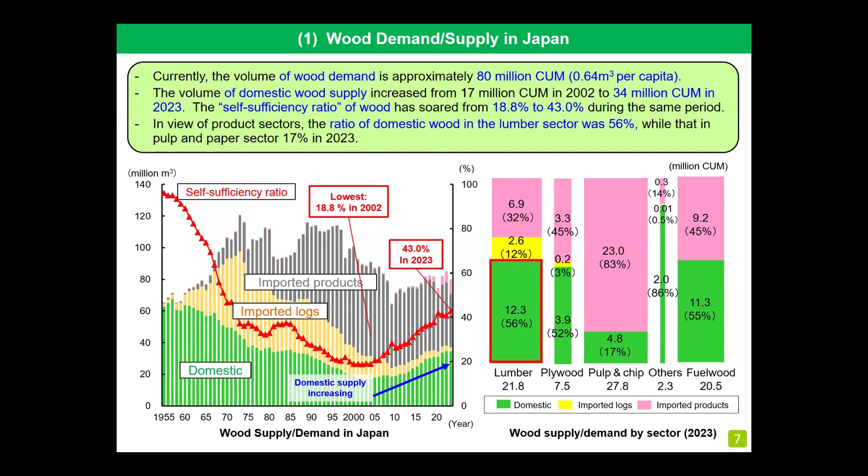In Japan, housing is the most significant sector for wood use. The share of wooden structure in housing is exceptionally high in the world. As shown in the left figure, the ratio of wooden housing to all housing, shown as the red line, remained around 55% for more than 15 years.

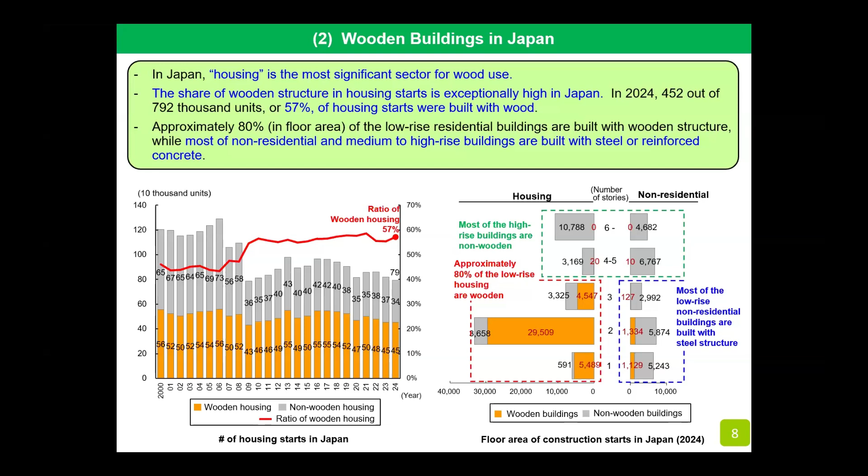The right figure shows the floor area of residential and non-residential construction starts by the number of stories. The orange area shows wooden buildings, and the gray area shows non-wooden buildings. If you look at low-rise, 3 stories or lower residential sector in the red dotted box, 80% of floor area is built with wooden structure. In contrast, most of the low-rise non-residential sector in the blue dotted box, and medium to high-rise sector, 4 stories or higher in the green dotted box, are built with non-wood materials like steel or reinforced concrete.

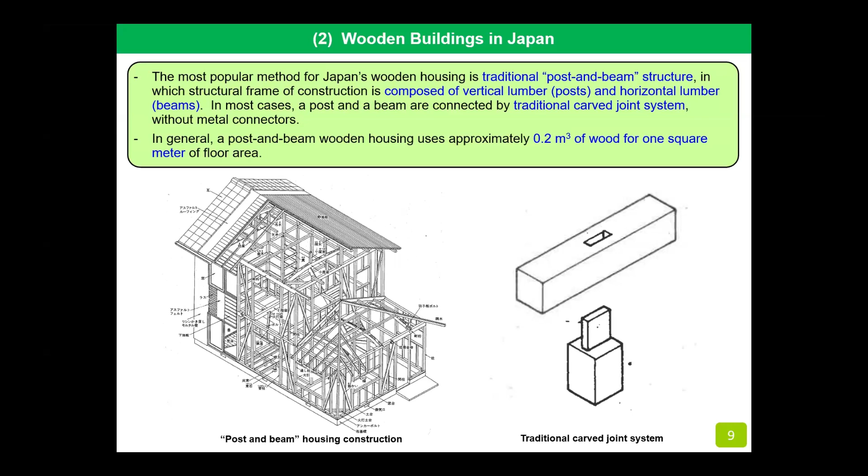The most popular method for Japan's wooden housing is the traditional post and beam structure shown on the left figure, in which the structural frame is composed of vertical and horizontal lumbers. Those lumbers are connected by a traditional carved joint system shown on the right figure. In general, post and beam housing uses 0.2 cubic meters of wood for 1 square meter of floor area.

In contrast to the higher ratio of wooden structure in the housing sector, non-residential buildings are mostly built with steel or reinforced concrete. In fact, the government promoted non-wooden building structures for public buildings after World War II in order to prevent fire and disaster.

But in 2010, the government introduced the law for the promotion of wood use in public buildings. The law obliged the central and local governments to promote wooden structure and wooden interior decoration in public buildings as long as possible. Thereafter, the ratio of wooden structure in low-rise public buildings rose from 18% in 2010 to 31% in 2023, as shown in the right figure.

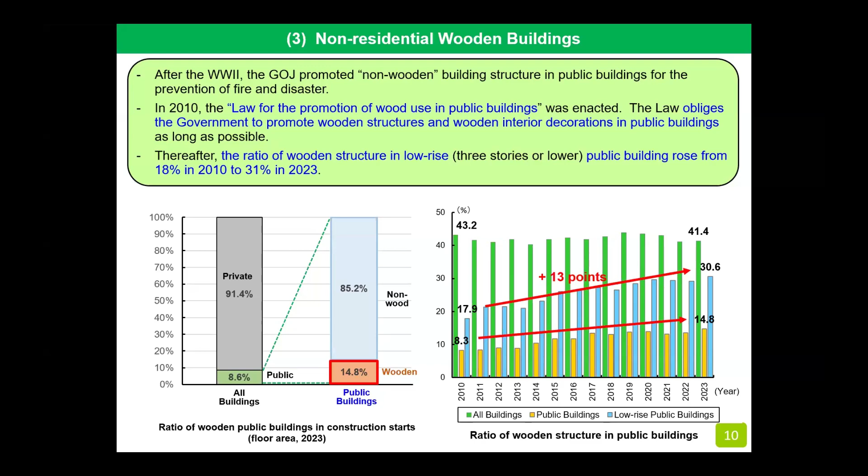In 2021, the law was revised to the Law for the Promotion of Wood Use in General Buildings, expanding its scope to cover private buildings as well as public buildings. The revised law introduced a voluntary wood use promotion contract system in which the central government, local governments, and private entities declare to promote wood use cooperatively.

Based on the contract, the government will provide necessary assistance to the contracted parties. As described at the bottom of the left side, the revised law designates October 8th as National Wood Use Promotion Day, because the Chinese letter for wood can be divided into the letters for number 10 and number 8.

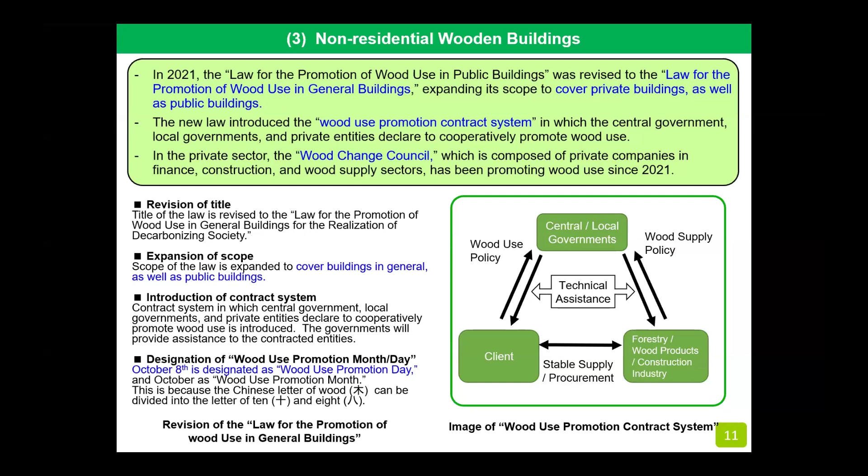Next issue is medium to high-rise wooden buildings. Structural members in medium to high-rise buildings are required to satisfy specific fire resistance performance stipulated in the building standard law. As shown in the right table, one hour of fire resistance performance is required for structural materials applied to the first to fourth floors from the uppermost floor, for instance.

In order to satisfy these requirements, private construction companies have already developed high-performance fire-resistant wooden materials which are covered with fire-resistant layers of incombustible materials, as shown in the left figures.

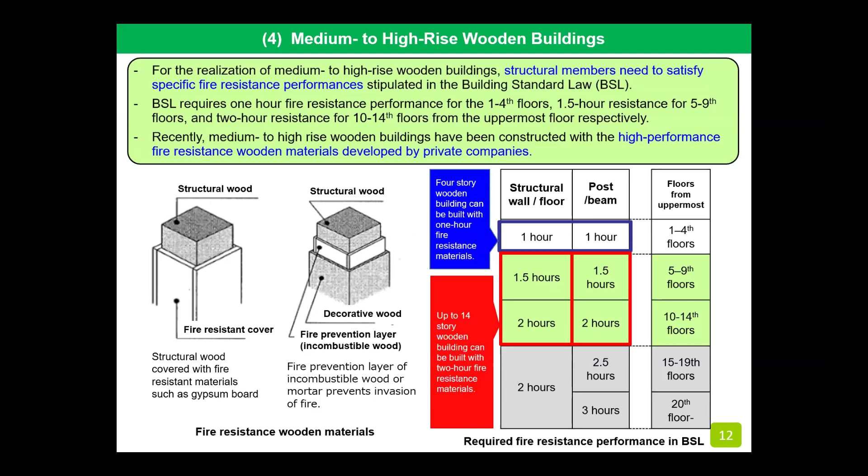Such fire-resistant wooden materials have made it possible to build many medium to high-rise buildings with wooden structures. In 2022, a purely wooden high-rise building with 11 floors named Port Plus was constructed in Yokohama.

CLT is another breakthrough for medium to high-rise wooden buildings. As you may know, CLT, or cross-laminated timber, has advantages of short construction period, lightweight, and high insulation performance.

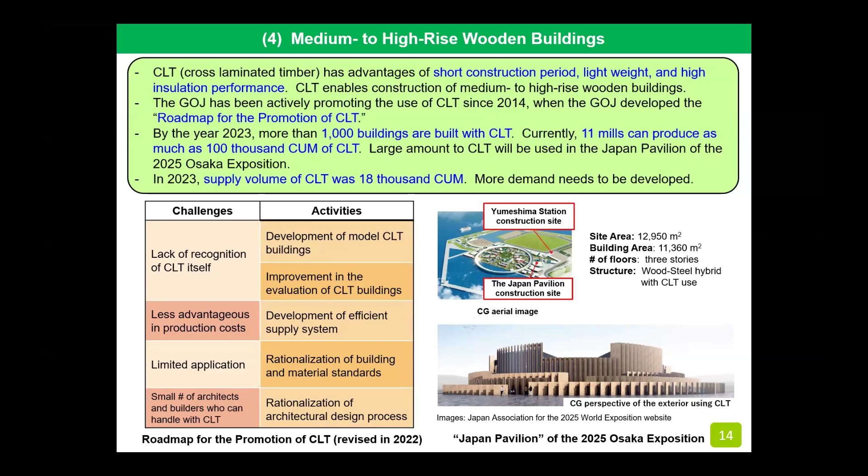Since 2014, the Japanese government has been promoting the use of CLT under the official strategy of the roadmap for the promotion of CLT, as shown in the left table. Also, a large amount of CLT is used in the Japan Pavilion of the 2025 Osaka Kansai World Exhibition, which started last month in Osaka, as shown in the right figures.

Next, I'd like to turn to the dissemination of the significance of wood use. Since 2005, the government has been promoting the significance of wood use to the general public through the national drive named Kizukai, which has a double meaning of both wood use and due consideration in Japanese.

The government is also cooperating with the private sector for wood use promotion, such as the Wood Design Award for consumer-oriented wood products, or wood education for small children. Also, Japan's major private corporations established the Wood Change Council for the promotion of wooden construction and interiors.

Then I'd like to move on to the sustainability issue. In the construction sector, wood use is expected to contribute to the carbon neutral society, as well as environmental, social, and governance (ESG) investment. Last year, the Forestry Agency developed the evaluation guidance of wood use in buildings for construction companies to appeal their efforts of wood use to financial institutions.

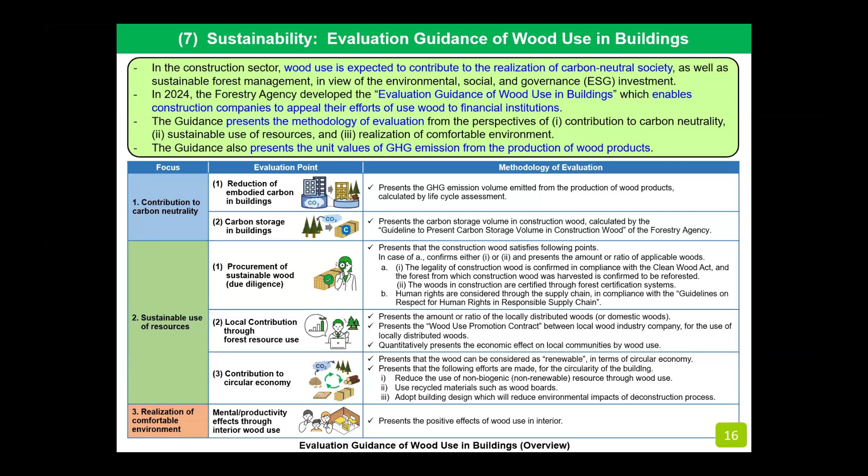The guidance presents the methodology of evaluation on contribution to carbon neutrality, sustainable use of resources, and realization of a comfortable environment, as shown in the table below. The guidance also presents the unit value of GHG emission from the production of wood products, as shown in this page.

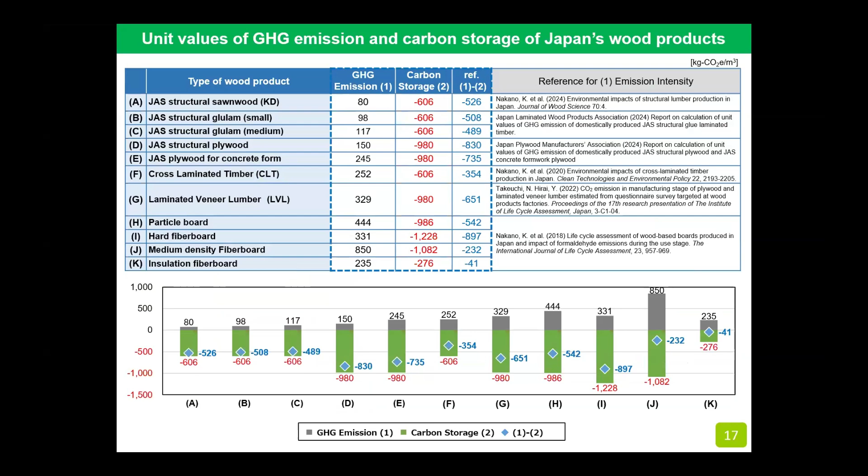I'd like to finalize with some conclusions. In Japan, most of wood demand depends on the housing sector. However, the number of housing starts will drop sharply in accordance with the decline in population.

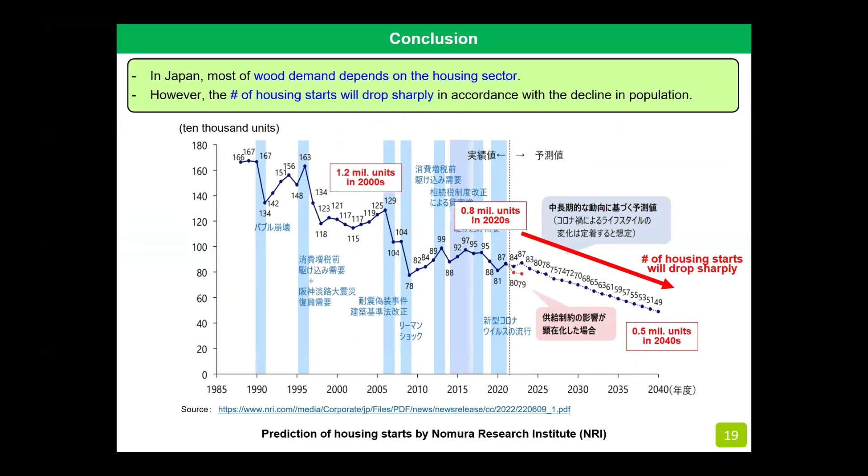In order to secure wood demand in Japan, wood use needs to be promoted in non-residential buildings and medium to high-rise buildings. Regarding non-residential buildings, the revised law for the promotion of wood use in general buildings promotes wood use in the private sector as well as the public sector.

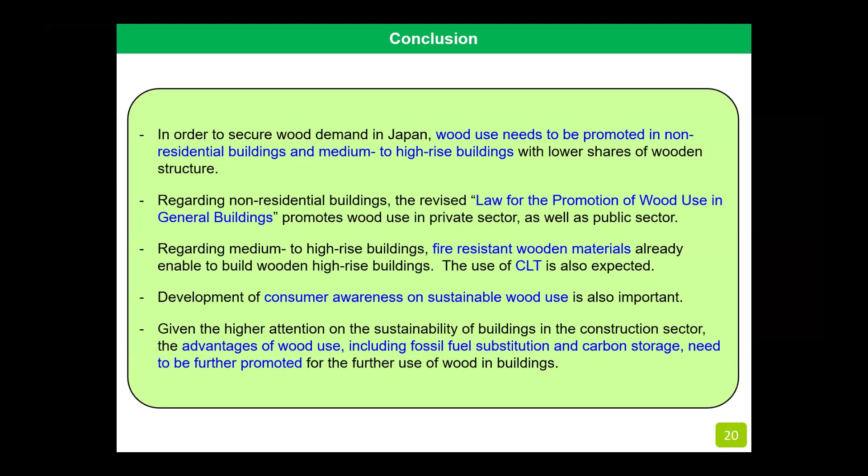Regarding medium to high-rise buildings, fire-resistant wooden materials have already enabled the construction of wooden high-rise buildings. The use of CLT is also expected. Development of consumer awareness on sustainable wood use is also important. Given the higher attention on sustainability of buildings in the construction sector, the advantages of wood use, including fossil fuel substitution and carbon storage, need to be further promoted for greater use of wood in buildings.

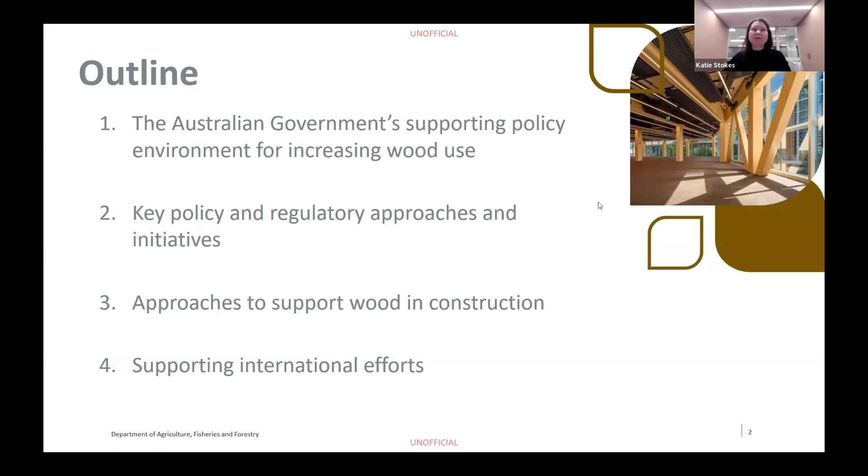The Australian government recognises the needs and benefits for increasing the use of sustainably sourced forest products. As we drive efforts internationally towards sustainable consumption and production, and we increasingly move towards a circular economy, we're all really aware of the invaluable role that forests and forest products can play. Forest products, when sourced sustainably, are renewable. They're able to store carbon and can offset other more emissions-intensive materials such as steel and concrete in construction. And at the heart of this lies sustainable forest management.

Australia is a really strong advocate for sustainable forest management and has comprehensive legislation in place to maintain forest ecology, biological diversity, and the full range of environmental, economic, and social benefits across all forest uses.

A key part of increasing wood product use globally is ensuring that we've got an adequate supply of wood. And that's about increasing our wood use without inadvertently leading to increased deforestation or forest degradation rates. The FAO projects that wood fibre demand may grow by as much as 50% by 2050 and take up to 33 million hectares of new plantations to meet. Given that it takes time to grow our wood resources, we need to plan now for tomorrow. Internationally, there's a need for increased emphasis on policies and programs that will ensure timber fibre security.

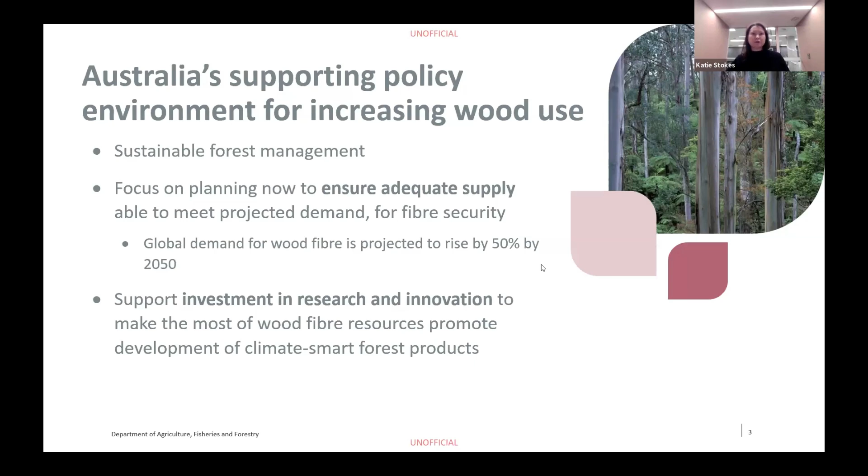The Australian Government has a number of key initiatives that focus on ensuring sustainable supply of forest products and promoting research and innovation in the forest industry. The Support Plantation Establishment Program aims to expand our domestic supply of timber, particularly our construction and manufacturing timber resources, while at the same time contributing to Australia's carbon emissions reduction targets and supporting regional communities through retaining and creating regional jobs. To further support a sustainable timber supply, since 2012, Australia has had comprehensive illegal logging prohibition laws in place. Our laws combat illegal logging and promote the trade of legal and sustainable timber products in Australia. We've recently updated these laws to ensure that they remain fit for purpose and align with international best practice, including implementing new provisions to allow for timber testing and verify claims of species and origin.

On the research and innovation side, the Accelerate Adoption of Wood Processing Innovation Program supports the medium to long-term sustainability of wood processors by stimulating investment in upgrades to manufacturing lines and supporting innovation to domestic products.

By supporting wood processing facilities to use innovative technologies in their production, Australia's forest industry will be able to supply more of our wood demands into the future. We've also established an Australia-wide National Institute for Forest Products Innovation, known as the Australian Forest and Wood Innovations. The institute was developed in partnership between the Australian Government and the University of Tasmania.

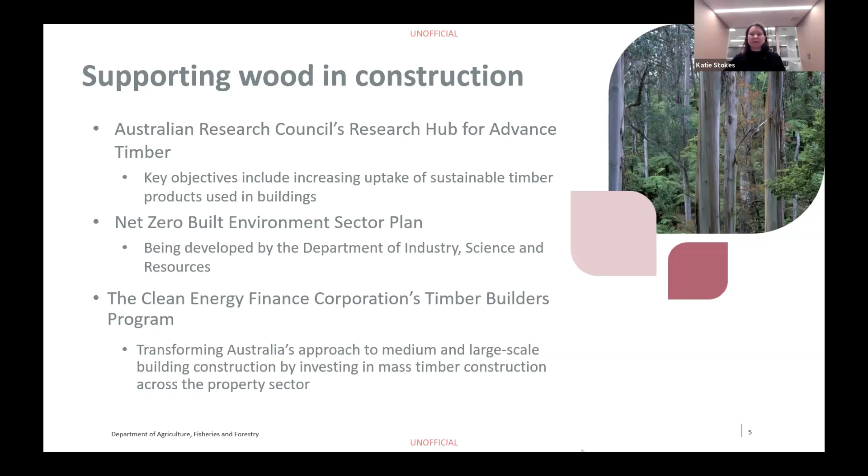Also worth mentioning here is the Australian government's current development plans to help major sectors transform to net zero economy in support of Australia's net zero plan. Under this initiative, the government's working to build a built environment sector plan to provide a pathway for the sector to transition to net zero, taking a holistic approach, which will include considering embodied carbon emissions in construction materials.

The final point I wanted to touch on is the importance of international efforts to highlight the immense value of increasing the use of sustainable forest products, such as this one. I'd also like to emphasise several other programs that Australia sees as really beneficial in this space, including the Collaborative Partnership on Forests Sustainable Wood for a Sustainable World initiative, which showcases the full value of sustainable wood value chains.

The Wood for Globe in the margins of World Forest Week last year also focused on sustainable wood pathways and their role in achieving carbon neutrality and resilience. And finally, Austria's country and organisation-led initiative, which aims to promote a sustainable forest-based bioeconomy through evidence-based innovative approaches for knowledge sharing and accelerated actions. The COLI aims to scale up sustainable wood pathways, including the enabling conditions to ensure sustainable supply keeps pace and to accelerate the bioeconomy approaches and wood-based solutions.

In summary, I'd just like to re-emphasise that Australia is committed to a low-emissions circular economy that's built on sustainable wood products. We emphasise the need to consider the broader operating environment for increasing wood use, including continued research, innovation, and strategic investment in plantations and processing to lay the groundwork for a sustainable climate-smart forest sector and to help incentivise the increased use of wood in the built environment.

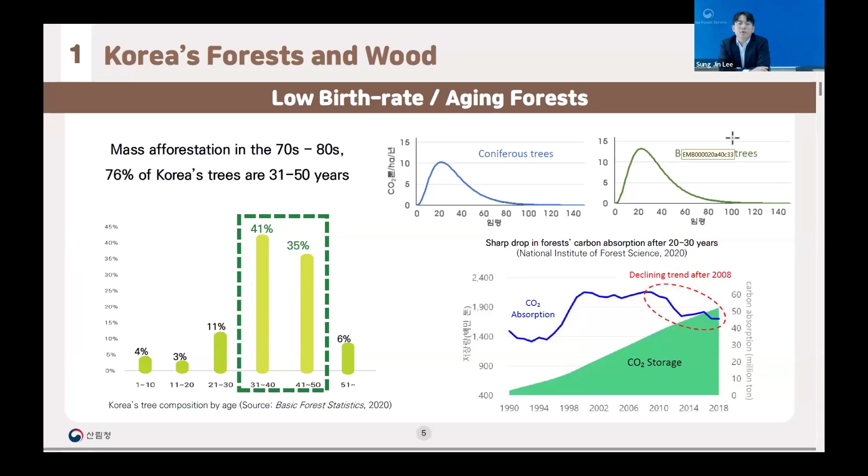However, we are now facing new challenges, such as an aging forest structure, just like the low fertility rate Korea is now facing, which reduces our forest carbon absorption capacity per year. And additionally, since Korea has gone through a very determined reforestation era, misconceptions about timber harvesting were created, and this has led to low timber uses in Korea. Currently, we're harvesting only about 20% of our productive capacity per year, which is much lower than other OECD countries.

And to address climate change, Korea has committed to reducing greenhouse gas emissions by 40% by 2030 compared to 2018. And forests will contribute 11% of this target through carbon sinks, afforestation, and increase of wood use. Korea's strategy involves using forests not just for carbon storage, but also as a substitute for fossil fuel intensive materials. And we aim to create a circular forestry resource management system from tree planting to sustainable harvesting and utilization.

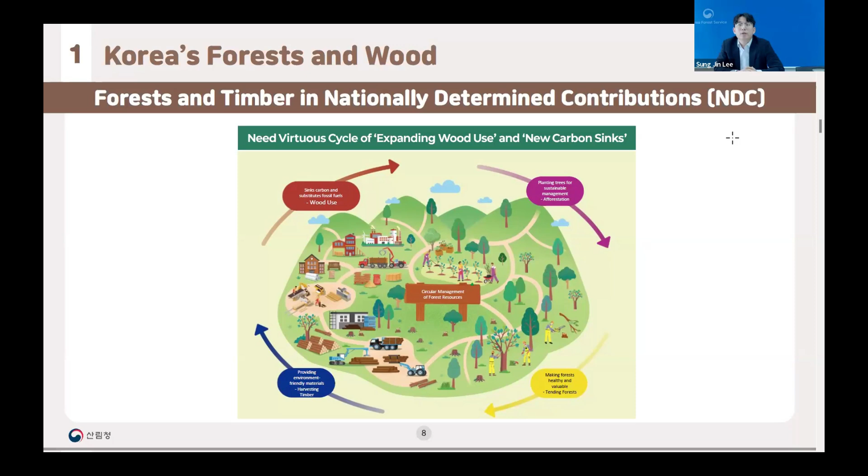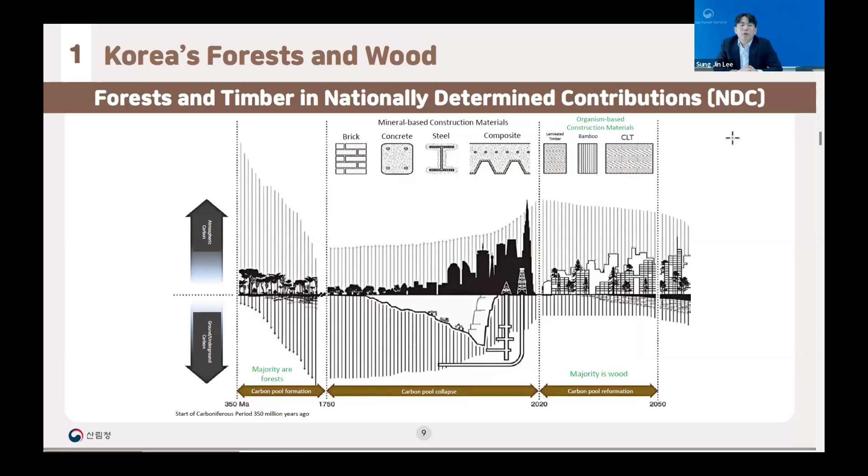And as you're well aware, we're trying to increase the use of wood, such as in wooden construction, in order to reduce the carbon in the atmosphere that has increased since the Industrial Revolution. And since Korea has difficulties with misconceptions of harvesting wood, as I mentioned, we are firstly focusing on increasing wood use in everyday life.

So we've launched public campaigns such as I Love Wood, including children's drawing contests, culture festivals, and social media outreach. These initiatives are aimed to raise awareness of domestic timber's environmental benefits. And we're also promoting public buildings made of domestic wood, for example, daycare centers and libraries. And we hope that citizens can see and feel the positive effects of wood, such as improved indoor air quality.

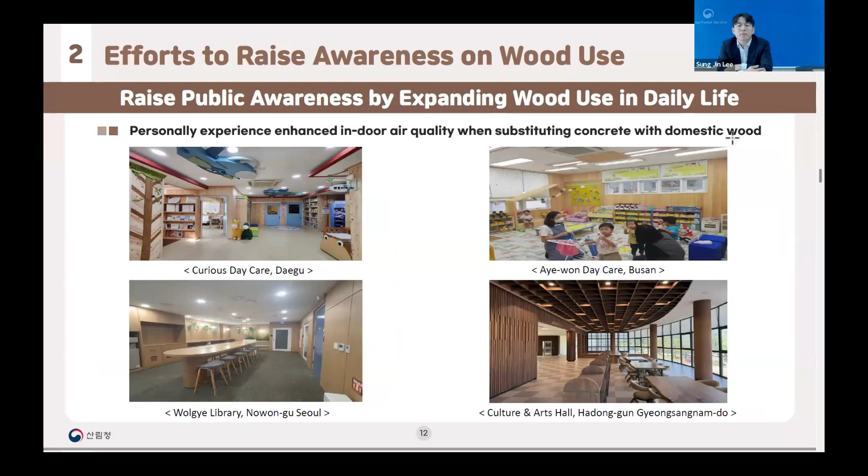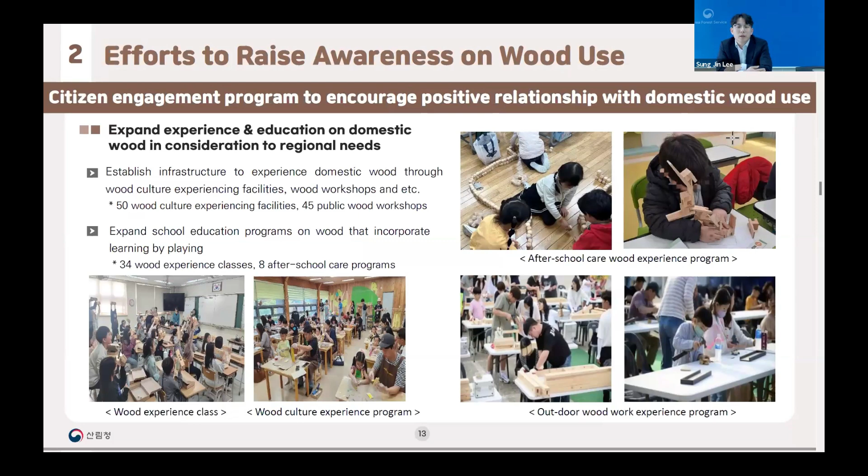Also, wood experience programs are expanding, offering hands-on learning in schools and communities through workshops and after-school classes. And to unify domestic wood branding, we created the Han Wood label, combining the Korean word for Korea, Han, and the Chinese character for wood. This is meant to help Korean consumers easily identify certified local timber.

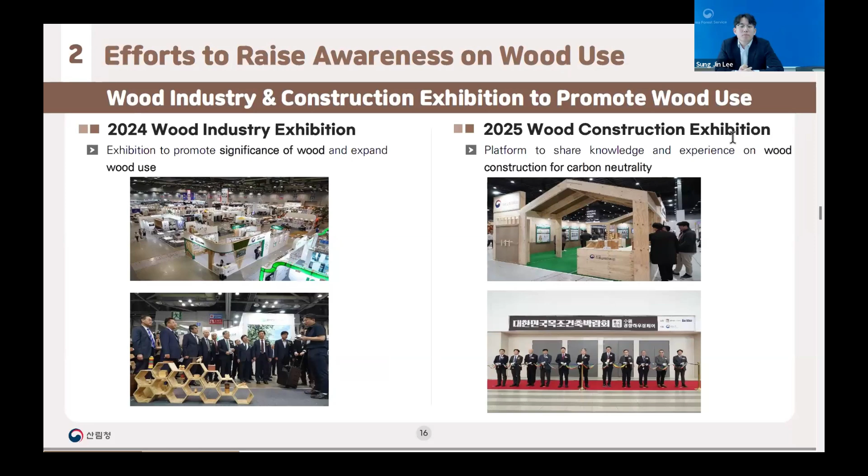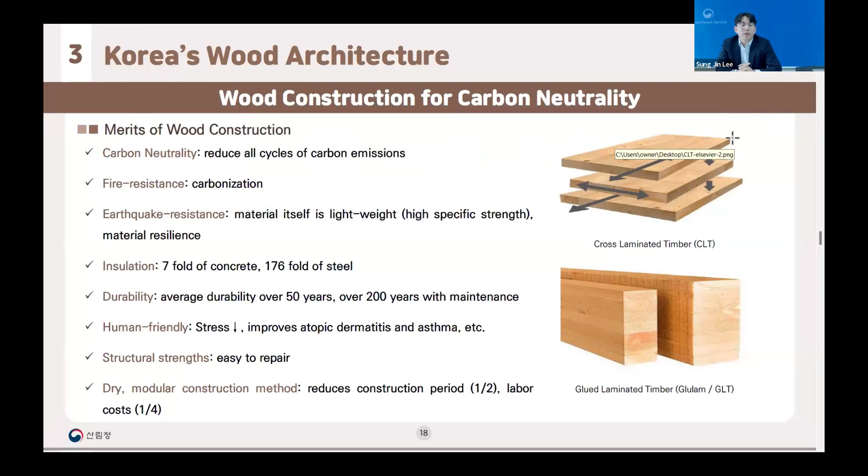We are hosting annual wood industry and construction exhibitions to showcase advancements and potentialities in wood-based architecture and trying to promote wood's role in achieving carbon neutrality. And although it has begun rather recently, Korea is investing in modern wooden buildings. For example, the Korea Forest Welfare Education Center is a 7-story structure, which is currently the highest in Korea. And it is built with over 1,300 cubic meters of wood, and it is storing more than 1,200 tons of CO2.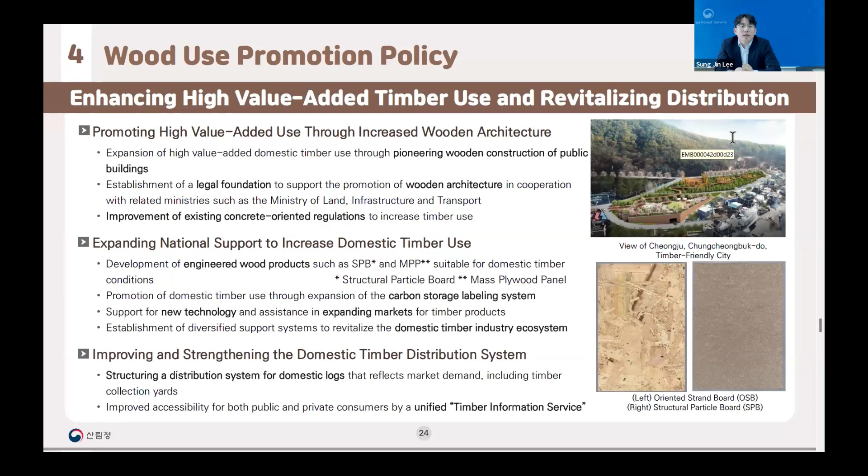And our wood use promotion policies aim to increase uses of domestic wood, especially with the manner of cascading principle, and improve its distribution. And we are revising concrete bias regulations to support wooden construction and developing engineered wood products, and we're also expanding the carbon storage labeling system for Korean wood products.

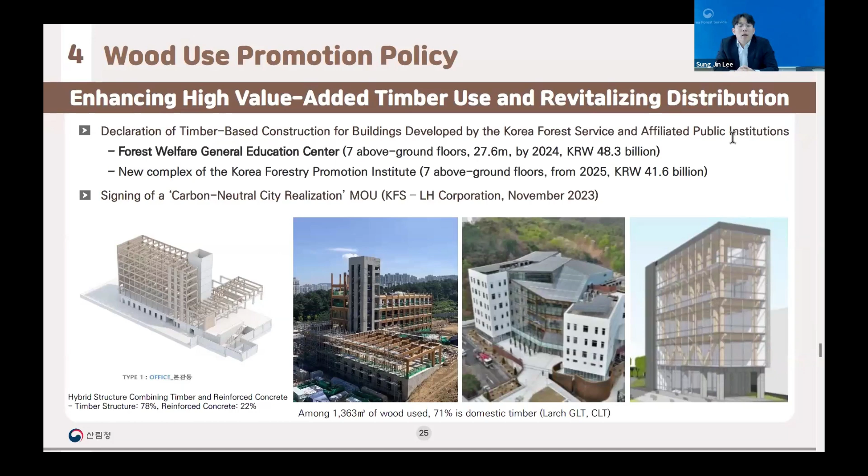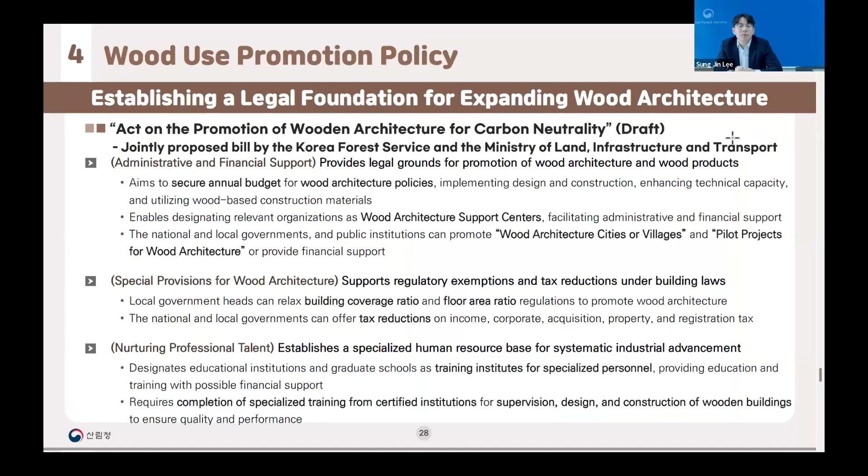And we're also piloting wood-based city models and urban infrastructure, such as bus stops and public facilities built with wood, to store carbon and raise public engagement. In addition, we are now drafting a wooden building promotion law to provide a legal foundation for wood architecture promotion. And this includes tax benefits, regulatory supports, and education of professionals in such industry.

The new legislation also emphasizes interagency cooperation between the Korea Forest Service and the Ministry of Land, Infrastructure, and Transport. We hope that once the law is introduced, a policy coordination committee will streamline joint efforts to promote wood architecture across the country.

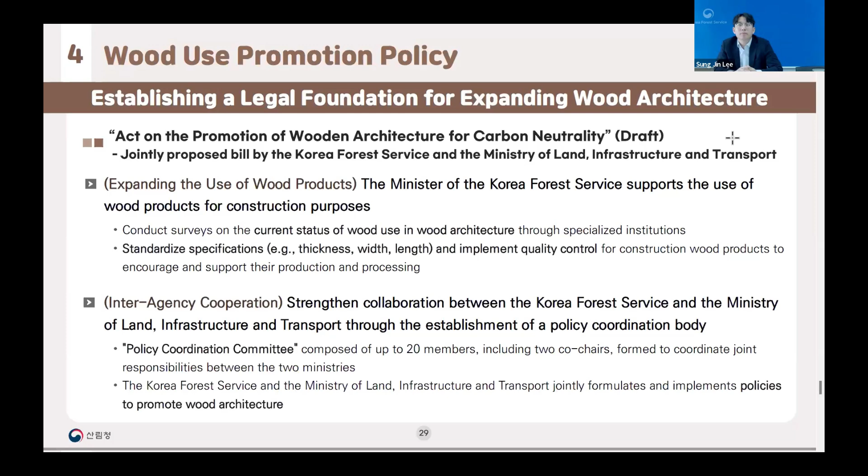For the domestic timber industry, we are establishing regional wood industry clusters in order to promote local production and consumption. And we are trying to ensure the full cycle use of forest biomass as well. We are also enhancing quality control and supporting exports to global markets.

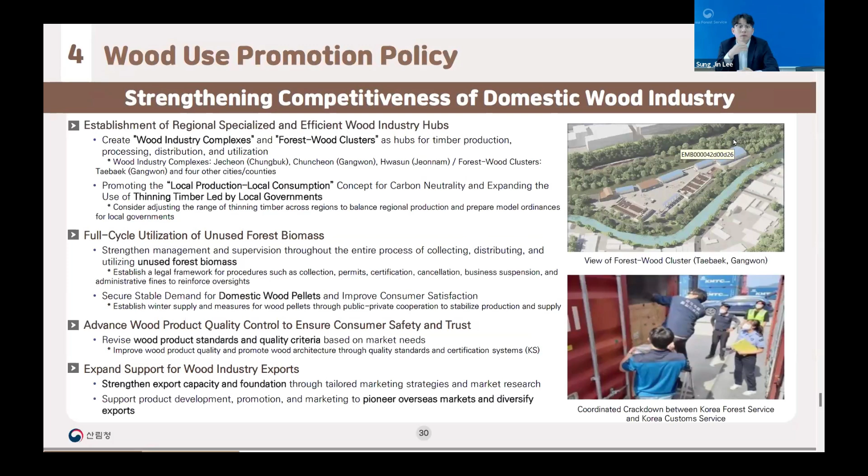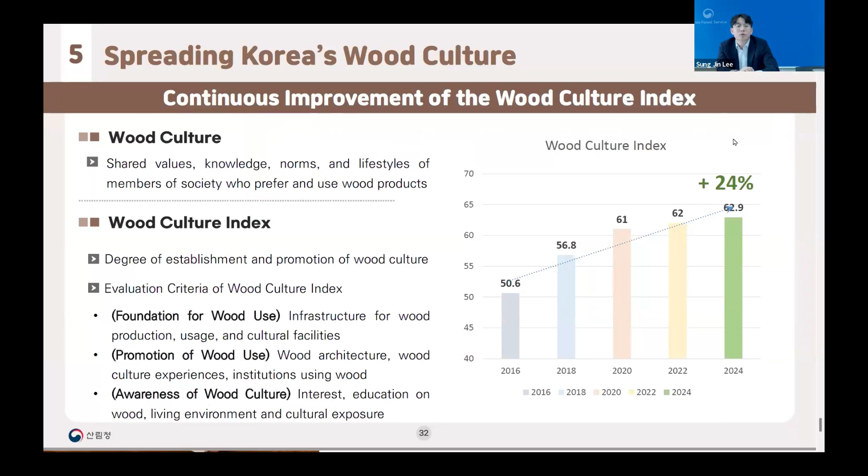And finally, we are committed to fostering a vibrant wood culture. We are trying to measure this through a wood culture index, which tracks infrastructure, education, and lifestyle engagement with wood. Our vision is to create valuable and healthy forests that benefit all Korean citizens.

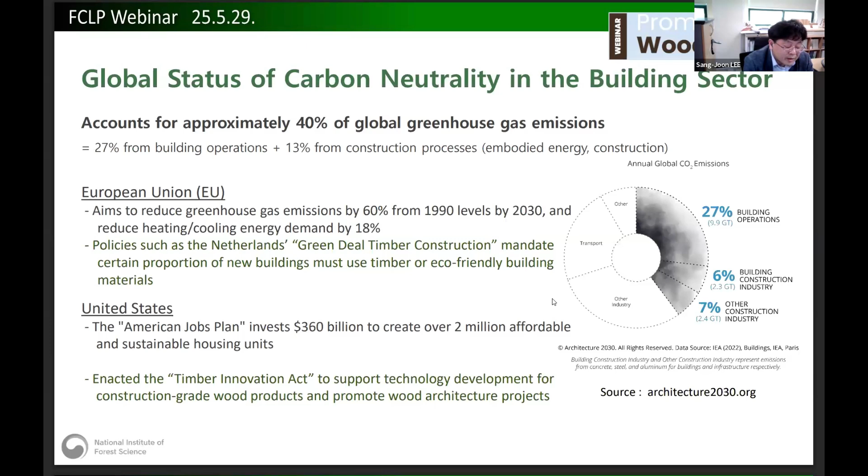Now let's examine the global status of carbon neutrality in the building sector. The building sector accounts for about 40% of total greenhouse gas emissions. This includes emissions from both the operational phase, like heating and cooling, and the construction phase. Developed countries such as the EU and US are making diverse policy efforts to realize carbon neutrality in this sector. Such efforts are especially being realized through the promotion of high-rise timber buildings.

Currently, the tallest timber structure in the world is the Ascent Tower in the US, which stands at 25 stories and 87 meters. With the development of advanced engineered wood products like CLT and various hybrid construction methods, the height of timber buildings has been steadily increasing since around the 2010s.

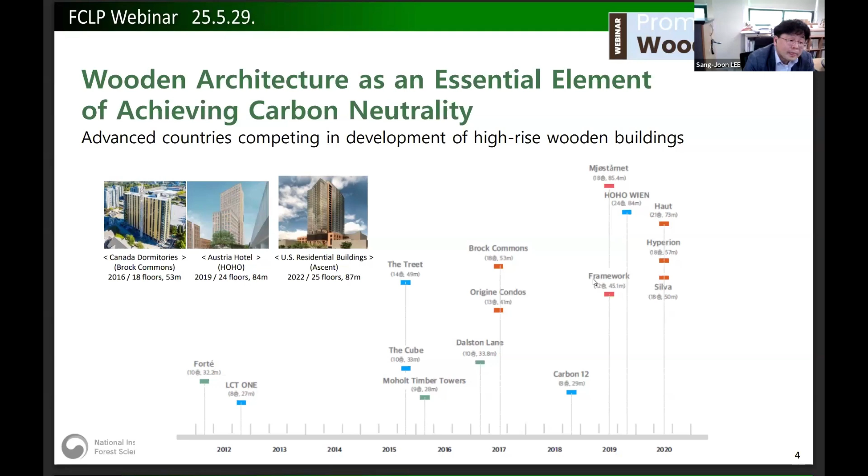Then let me introduce the current situation in Korea. As you see, various types of timber buildings are constructed in Korea. Prior to industrialization and the Korean War, traditional timber housing in the form of what we call hanok, or post and beam wood construction, was the norm. However, since the 1980s, light frame construction methods from North America have become mainstream in Korea with partial applications of heavy timber and truss systems.

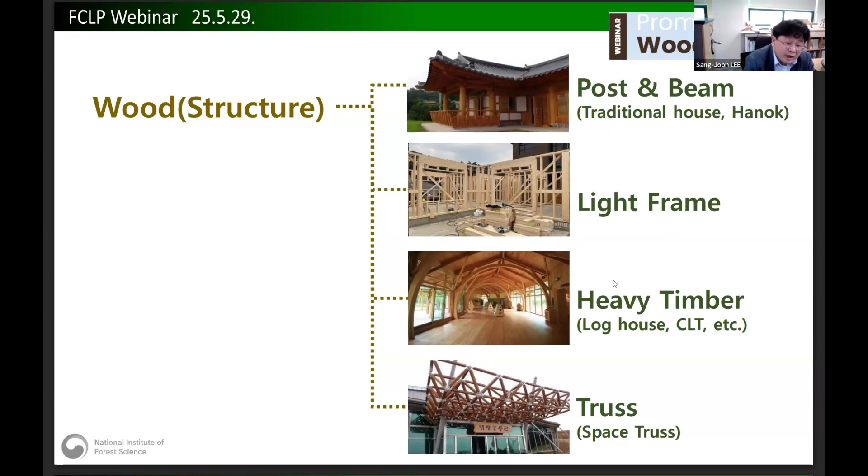Let us take a look at the current status of residential buildings in Korea. In conclusion, timber construction in Korea is still largely limited to light frame structures, accounting for only around 6% of all building units. In terms of total floor area, it represents less than 1%. This is mainly due to the rapid spread of reinforced concrete structures during Korea's rapid economic development, especially in urban areas where apartment living has become dominant, replacing timber constructions.

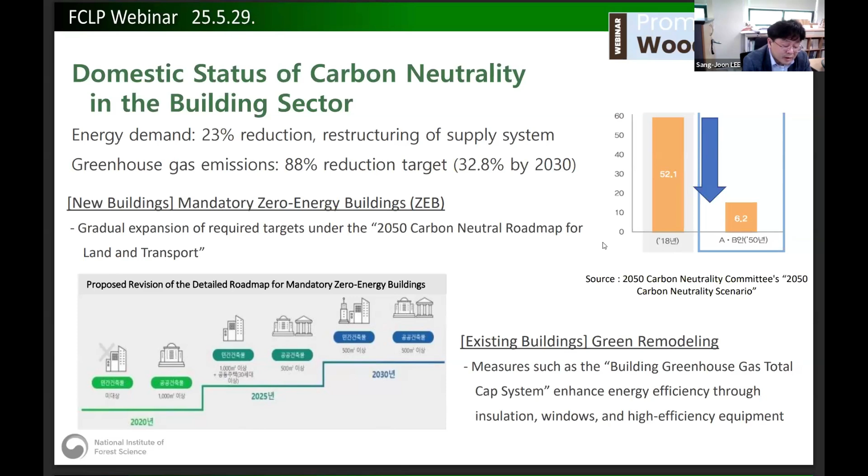Korea is implementing its 2050 carbon neutrality scenario to fulfill international agreements. In the building sector, Korea aims to reduce greenhouse gas emissions by a significant 88% compared to 2018 levels. To achieve this, the government is enforcing mandatory zero energy standards for new buildings and promoting green remodeling for existing buildings through various policy initiatives. However, it is true that efforts to reduce greenhouse gas emissions from materials and construction processes have been relatively overlooked.

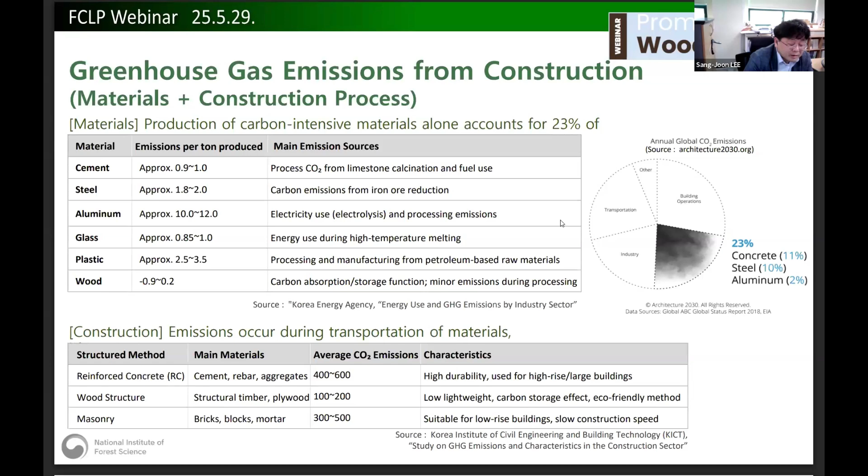As can be seen in the following tables, wood emits far less carbon dioxide compared to other building materials like cement and steel, or in fact, stores carbon. Furthermore, wood is lightweight and allows for dry construction, resulting in lower greenhouse gas emissions during the construction process. The reasons for switching to timber construction are clear. Wood stores carbon and is the only eco-friendly building material capable of replacing carbon-intensive materials such as concrete and steel, thereby contributing to greenhouse gas reduction. To realize carbon neutrality and improve the quality of life for our citizens, we are actively promoting R&D in timber construction.

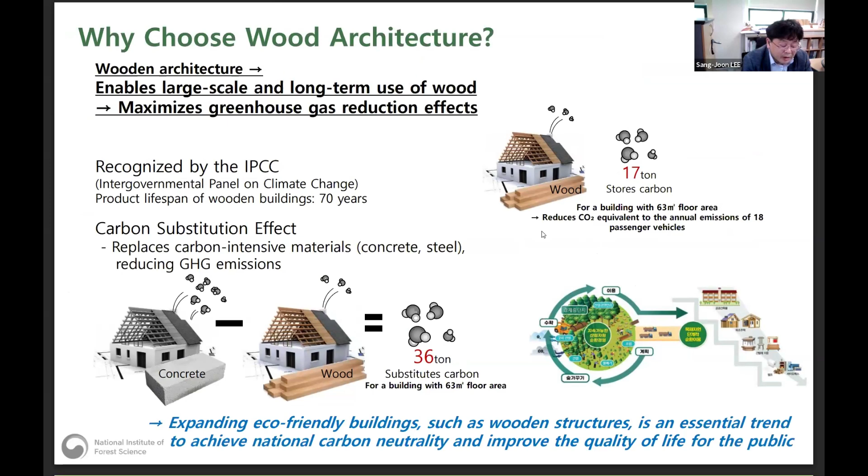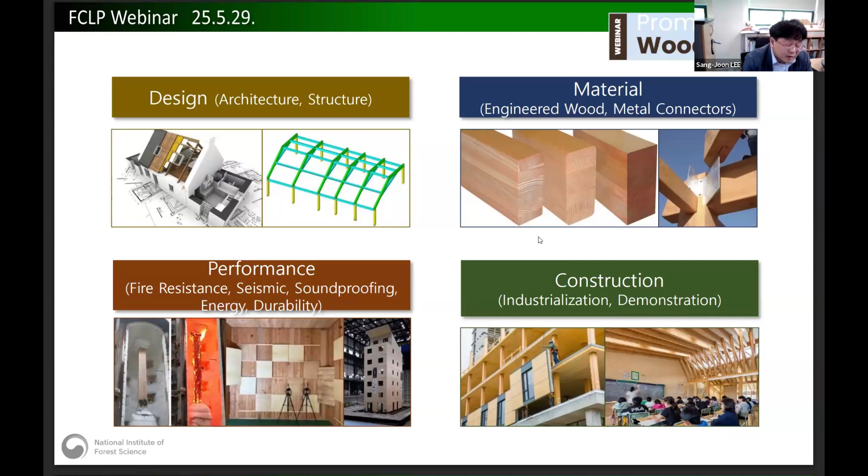Then I would like to introduce key R&D achievements of wood construction in Korea, mainly by our institute. Architecture is often described as a comprehensive art form, requiring technological development in various areas such as design, materials, performances, and construction methods. This table summarizes our research team's analysis of Korea's technical level compared to advanced countries. In particular, we have identified the need for localization and technological independence in materials like metal connectors. Despite extensive research, the lack of real-world applications necessitates further development of construction technologies.

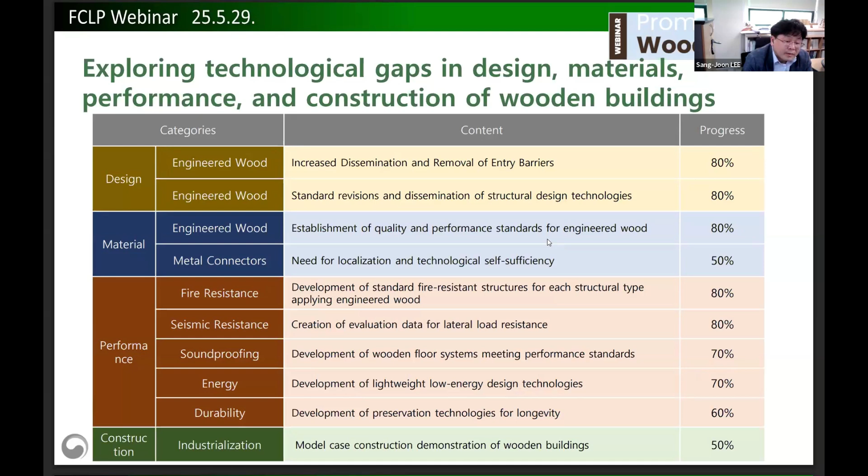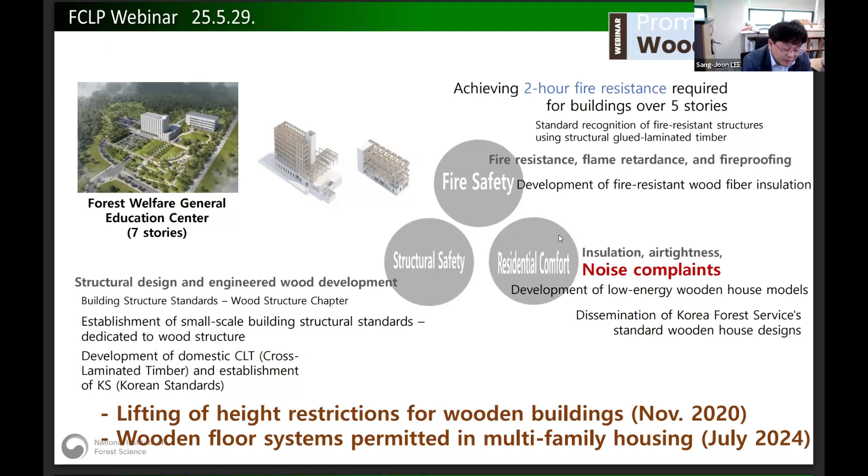Moreover, since reinforced concrete remains the mainstream construction method in Korea, there are regulatory constraints on timber construction. Our research team has made consistent efforts to abolish height restrictions for timber buildings. And we also try to allow wooden floor systems in multifamily housing. As a result, it is now possible to build timber apartments in Korea. Now, I will present our key achievements in design, materials, performance, and construction. Let us begin with the design. As shown here, we have established various design standards, such as Korean design specifications, and distributed various manuals to facilitate the design of timber structures in Korea.

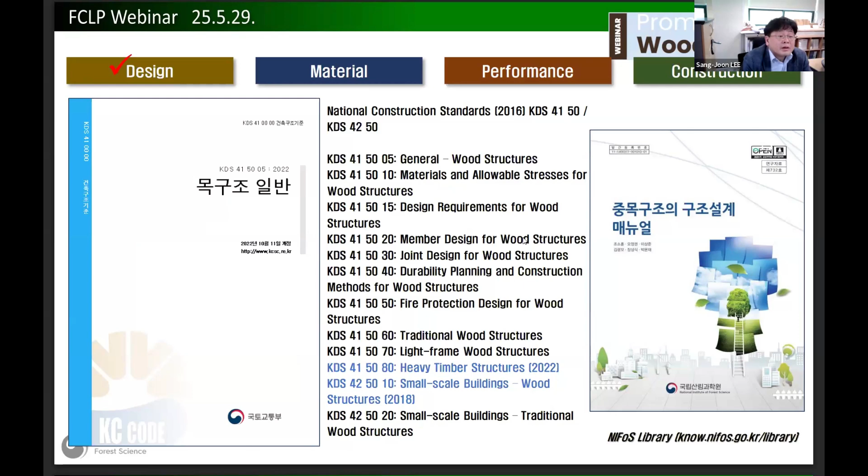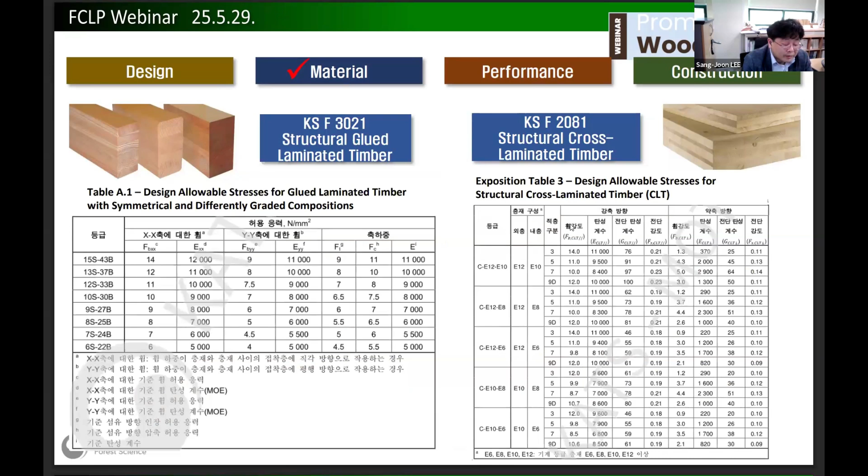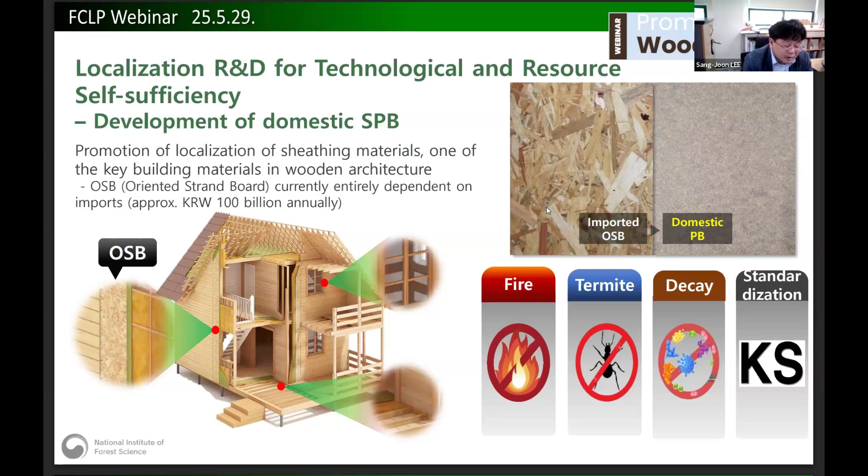Regarding materials, as you may know, a wide variety of engineered wood products can be applied in timber construction. In particular, structural glued laminated timber used for post and beam systems and CLT for wall-type mass timber construction are actively being used in Korea's timber buildings. To support the quality and dissemination of these materials, Korean standards have been developed for engineered woods. R&D for localization of timber construction materials is also actively underway. For example, we have developed a Korean-made structural particle board to replace the currently imported OSB, supporting technological self-reliance in Korea. As you can see, the newly developed materials are being verified through real-scale demonstrations.

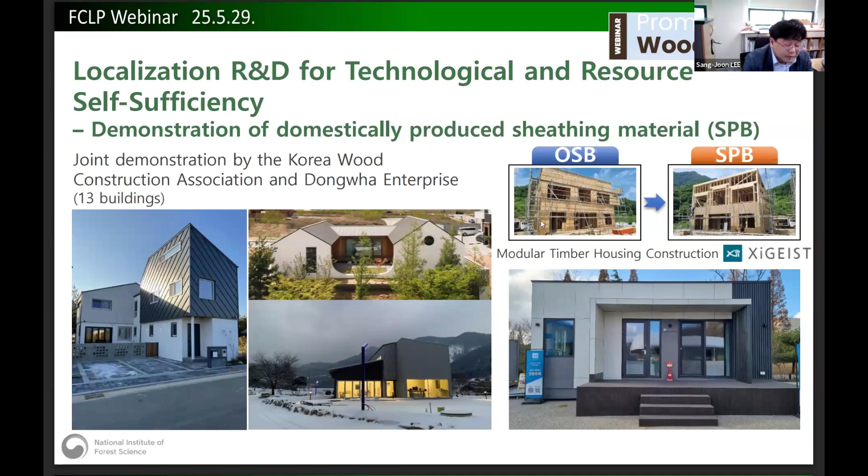One of the biggest challenges in promoting timber construction is ensuring fire safety performance. To address this, we have established fire resistance design methods for each structural component, columns, beams, walls, and floors, to enable safe timber construction in case of fire.

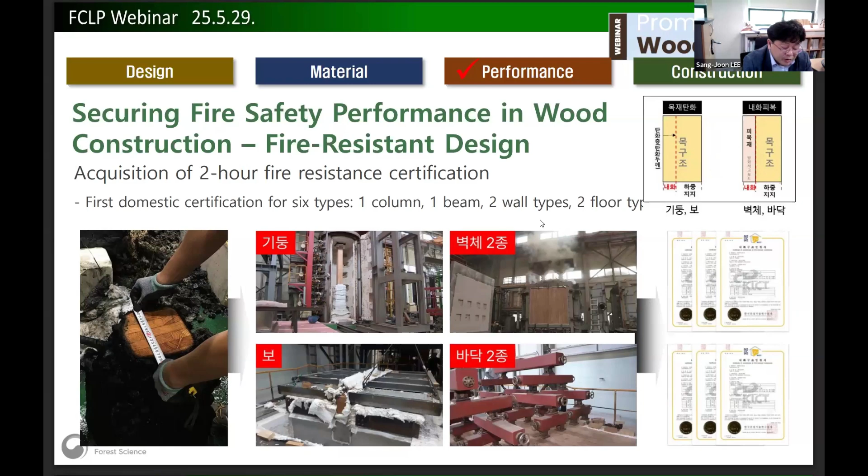As a result, one minute to go.

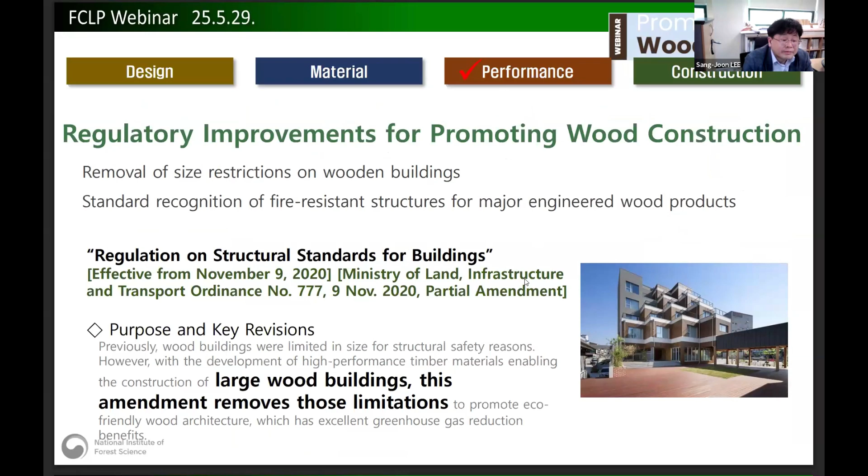I'm sorry, I'll hurry. Fire resistance standards for major engineered wood materials were approved. This led to the removal of size restrictions for timber buildings, allowing construction without limitations on scale. I'll skip this one. And finally, from a construction perspective, Korea still lacks extensive construction experience in timber projects. Therefore, we are continuously conducting research into advanced construction technologies, such as off-site construction.

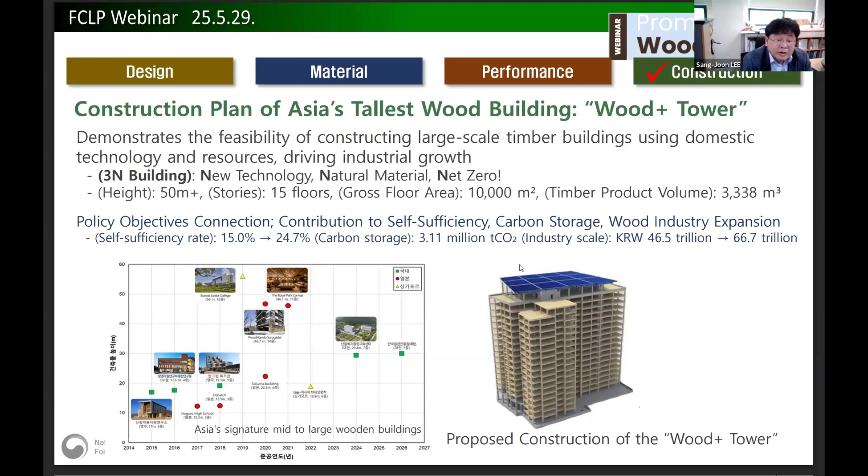Thank you, Dr. Lee. The potential for wood never ceases to amaze me. The key messages I had from that presentation: that zero energy building is a key change for the sector, and the 3N idea, new technology, natural material, and net zero. Hopefully we can follow up on both of those ideas in our question and answer session, because I think they can resonate with a lot of our participants today.

Our second speaker on wood construction is Mr. Hiroaki Nishimura, Senior Deputy Director in the Councillor's Office for Building Regulations, Housing Bureau, in the Japan Ministry of Land, Infrastructure, Transport and Tourism. Mr. Nishimura is currently responsible for fire safety regulations under the Japanese Building Standards Act. Mr. Nishimura has experience with regulatory reforms, urban planning, policy developments, and was seconded for a period to the Japanese Forestry Agency, where he contributed to the development of cross-laminated timber standards. Mr. Nishimura, the floor is yours.

I'm currently a Senior Deputy Director at the Ministry of Land, Infrastructure, Transport and Tourism, MLIT, and am responsible for building regulation. Today, I'm honored to have this opportunity. I'm going to explain the recent rationalization of fire safety and structural building standards for wooden buildings. Under the Japanese Building Standards Act, a building can be made of wood, steel frame, and concrete as long as they meet the standards set by law. I'll explain this more in detail.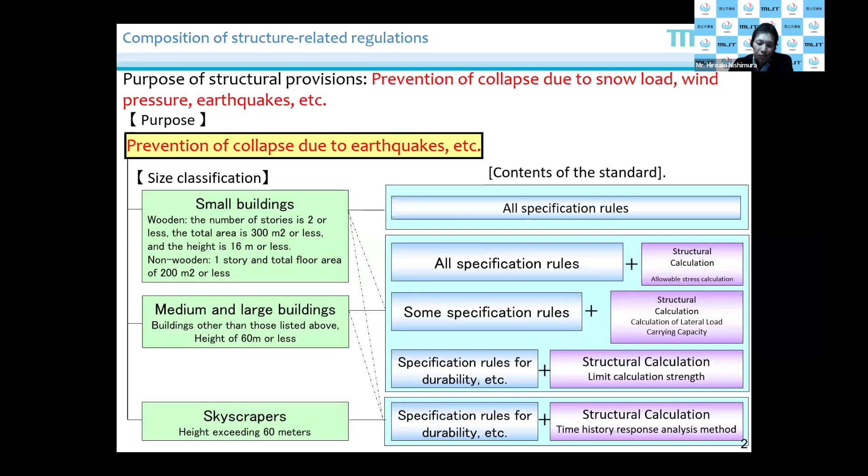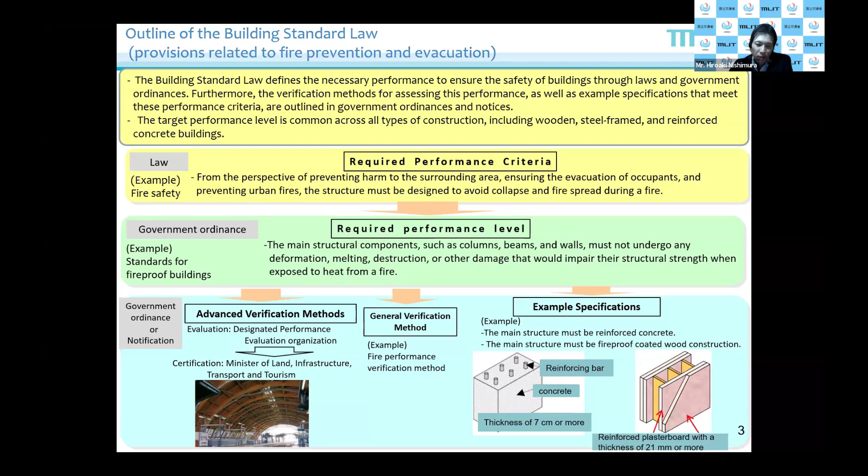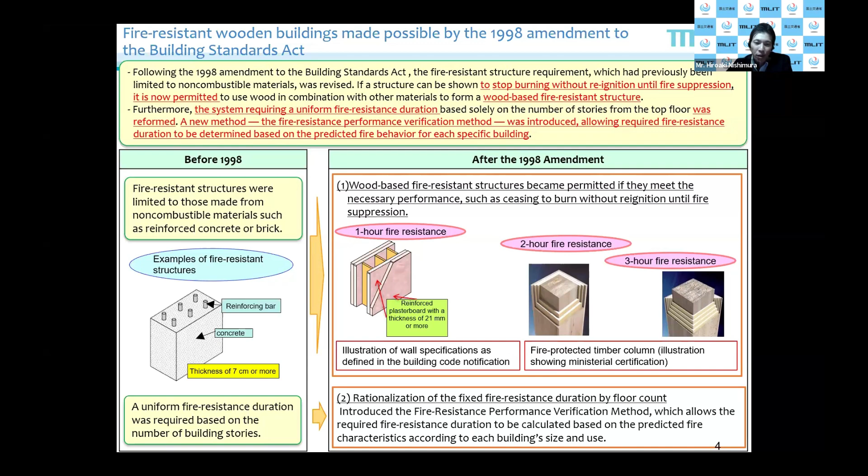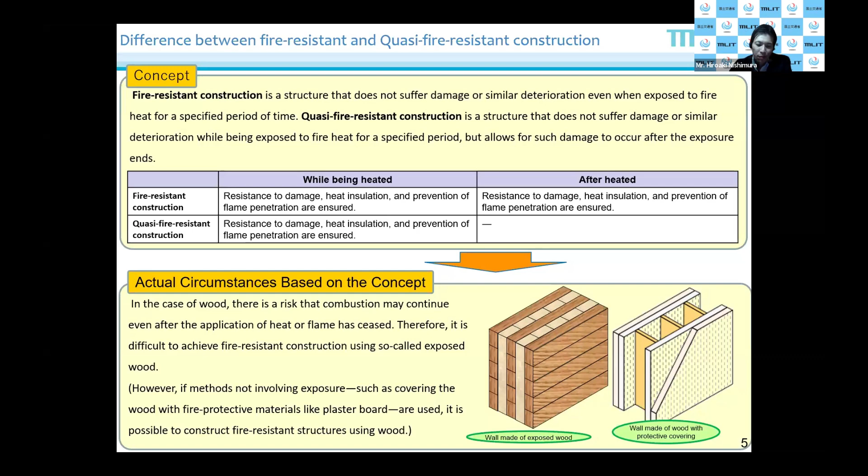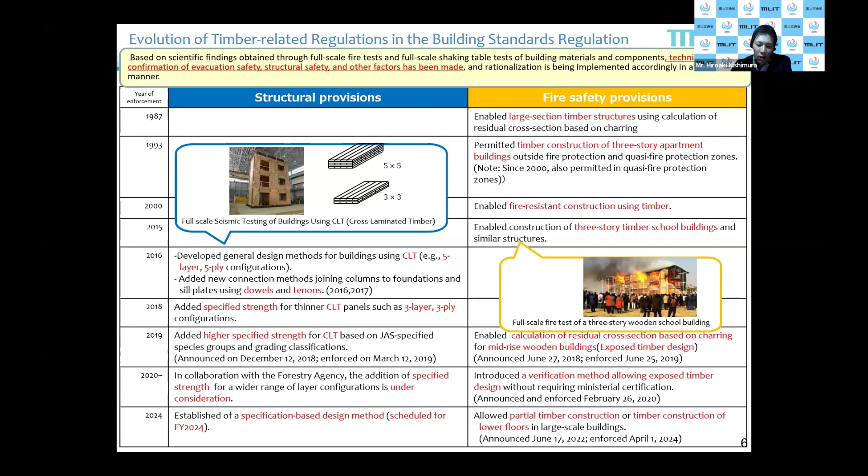Okay, I skipped this slide. Next slide, please. This is also an example of quasi-fire resistance construction, due to the amendment of the Building Standards Act.

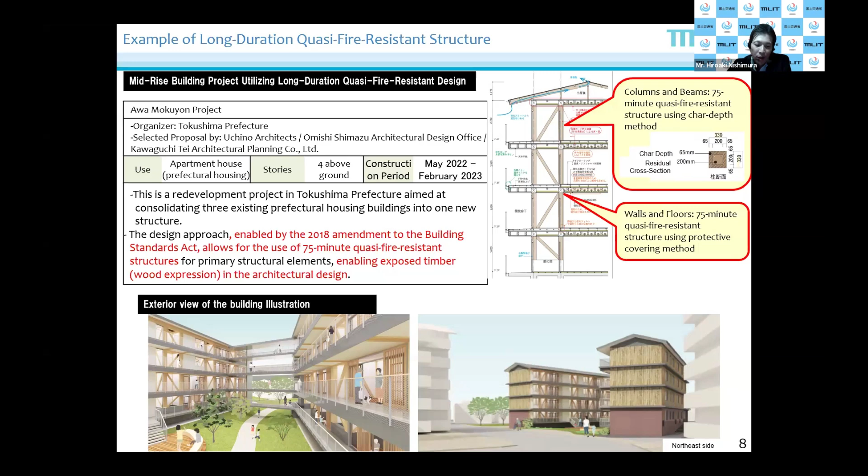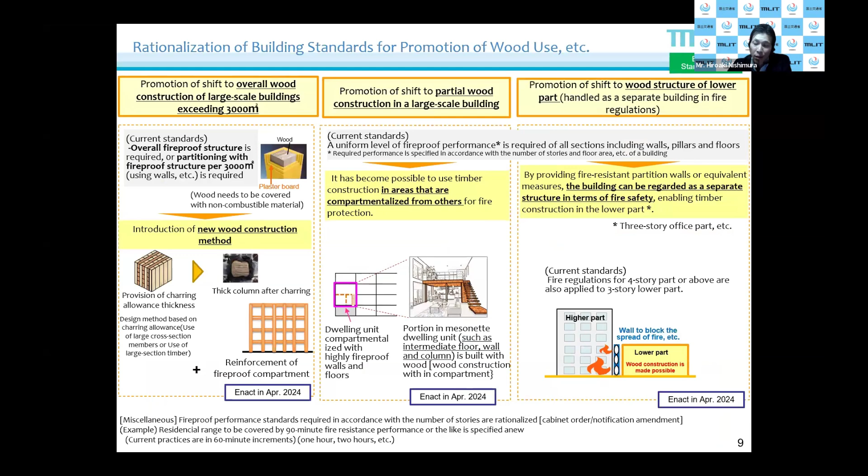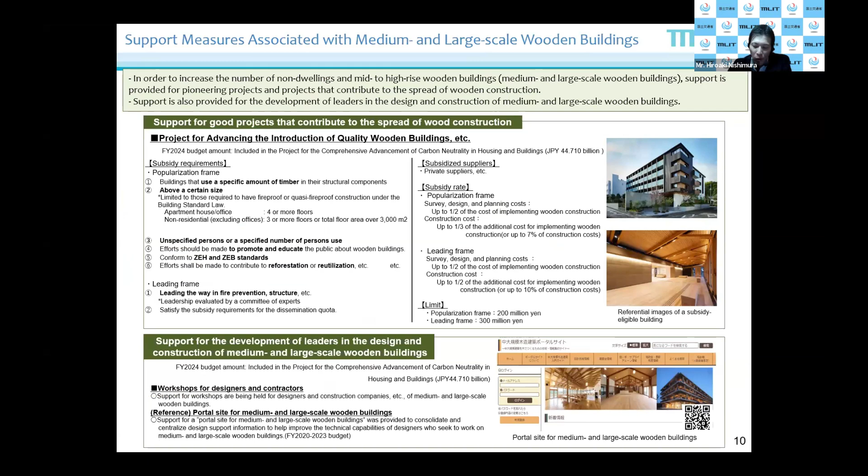This is the recent rationalization of the protection regulation that came into effect in April 2024. And this is the subsidies MLIT provides to increase the number of non-dwelling buildings, high wooden buildings, to promote wooden construction.

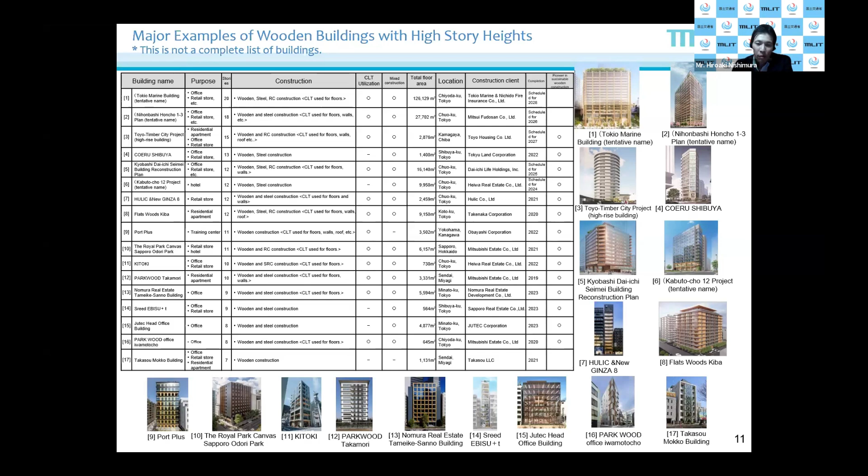Thank you, Mr. Nishimura. Structural resilience is often one of the greatest weaknesses that spring to mind for people when they're thinking of timber and construction. It's great to know that this issue can, with careful planning, design, and engineering, be effectively addressed. Our final presenter for the theme today is Mr. Tevita Bulai, Head of Department and Acting Conservator of Forests in the Fijian Ministry of Forestry. Mr. Bulai has over 25 years' experience in Fijian forestry, with both undergraduate and master's degrees from the University of Canterbury in New Zealand, specialising in forest management. Mr. Bulai, the floor is yours.

You're just a little dark, Mr. Bulai. Thank you, Joseph. Are you having access to my presentation? We can hear you loud and clear. Happy for you to present. Okay, thank you.

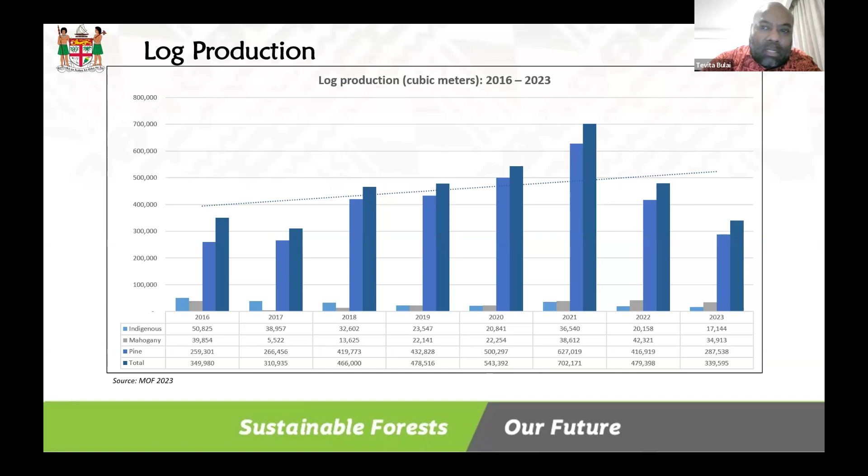So our role, under the Ministry of Forestry, is to license and monitor harvesting operations, forest harvesting operations, sawmilling, timber treatment plants, timber export, and timber importation. This is one of the main roles for the Ministry, considering the size of Fiji and its forests. We want to make sure that while we promote reforestation and replanting, whatever production forest we have is harvested sustainably. While we focus on sustainability in harvesting, we also have the sawmilling code of practice to ensure whatever comes out from the forest is utilized well in terms of timber use. We also monitor timber treatment plant operations, timber export, and importation.

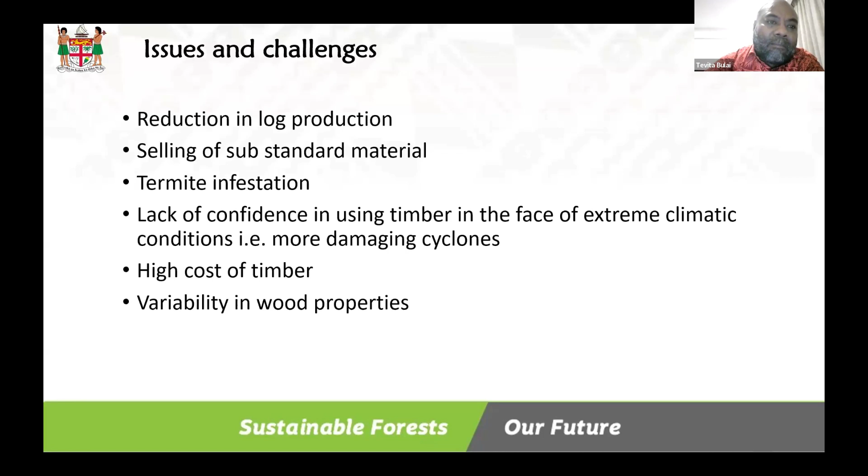Our way forward, as I mentioned, we have two major plantation forests. We are looking at the aims for the next 10 years to double their production, assisting the two major plantations to double production to meet the increase in demand for timber.

And partnership with landowners and forest companies to establish plantation forests, promote the production of engineered wood products. This is a new project for us where we are using sterile coconut palms, old coconut palms that no longer bear fruit, for engineered wood products. We're actually utilizing this, and it's still a project at the moment to promote and develop engineered wood products.

To promote the design and construction of large timber building projects, review of forest legislation including the National Building Code, which is currently undergoing review in Fiji, where we are providing input and promoting the use of timber especially for building, and also to enhance monitoring, control, and surveillance of our forests and wood processing operations.